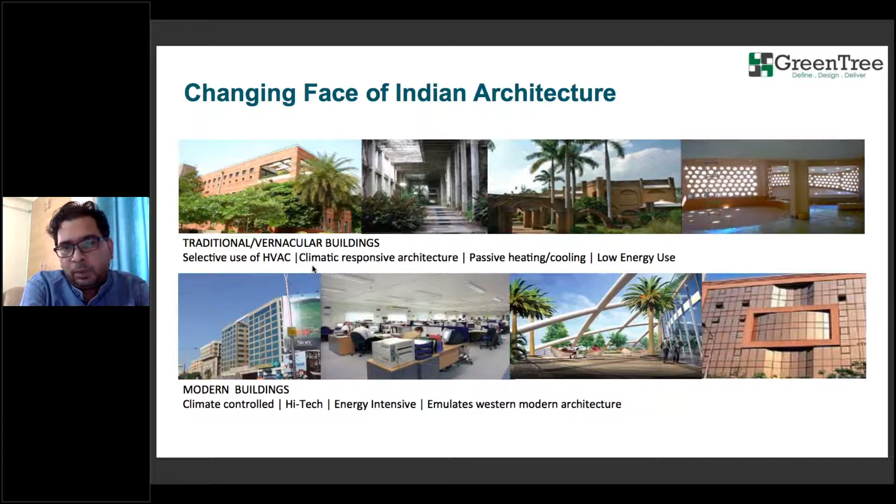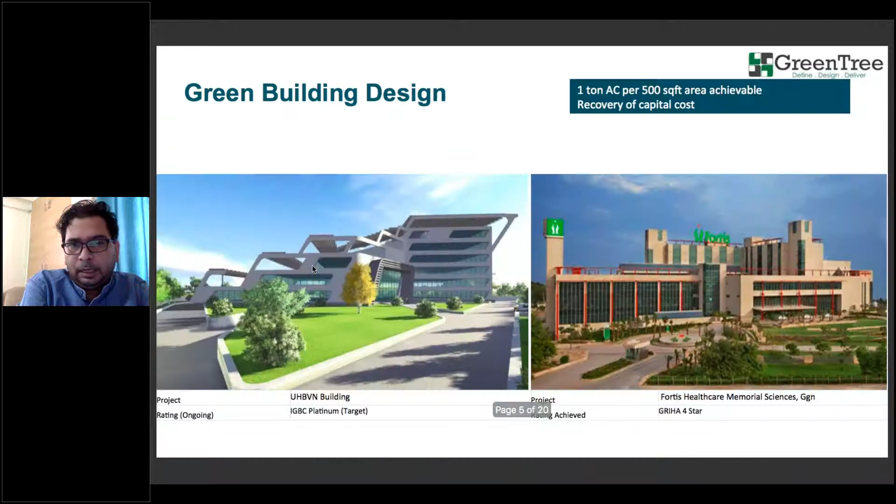My dear friends, I have worked with architect Charles Correa in my early career, and I have seen how architecture practice is defined by different sets of spaces. For example, we've seen spaces in terms of built mass designed with Jharokha, Jalis, courtyard planning, and lots of trees around buildings. Nowadays the buildings we see are a bit more modern, not that there's any issue with them, but they look modern. Whether in India or in developed countries, you'll see similar sets of buildings with specific built design aspects combining architecture and engineering.

That is where we see super efficient buildings, super platinum, or 5-gem, 4-gem star rated buildings. We always see an opportunity to learn from different aspects of buildings. But if we look at the core of all these aspects, even the core of the human body, we can always correlate specific components like Vayu, Agni, Jal, Akash, and Bhumi. They are all related to the built environment, and to the emotional, intellectual, and social well-being of the human body.

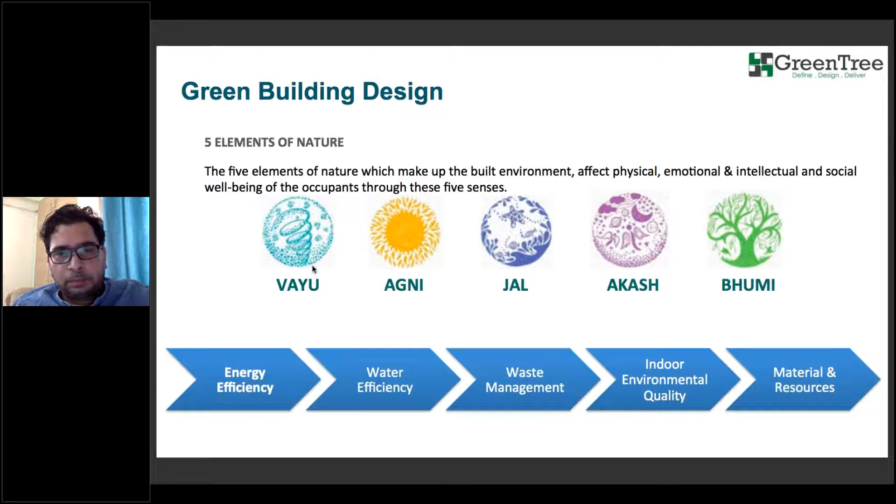तो ये सब चीजें बहुत इंपॉर्टेंट है। आई जस्ट शो यू थ्रू किस हिसाब से बिल्डिंग का जो एनर्जी एफिशिएंसी कंपोनेंट है, किस हिसाब से अचीव होता है। एनर्जी एफिशिएंसी के अलावा आई विल आल्सो ट्राई टू टेक यू थ्रू अबाउट द जॉब अपॉर्चुनिटीज एस्पेक्ट्स इन दीज स्पेसिफिक सोफिस्टिकेटेड एरियाज, ताकि आप लोग अपने लिए कुछ इस प्रेजेंटेशन से अचीव कर सकते हैं।

जब हम लोग बिल्डिंग की बात करते हैं तो सर्टेनली द फर्स्ट थिंग दैट विजिबल इज द एनवलप। जब हम लोग विलेज से लेकर के सेमी अर्बन लोकेशन और अर्बन लोकेशन से बात करते हैं, आप रियलाइज़ करते हैं कि बिल्डिंग की जो डिजाइन है वो गांव में बिल्कुल अलग होती है। छोटे छोटे घर होते हैं, जनरली मिट्टी के बने होते हैं या छोटे घर होते हैं, उनकी विंडो की जो साइज है वो कम होती है।

जैसे आप सेमी अर्बन लोकेशन में जाएं, आप देखिए घर के साइज बढ़ जाते हैं। ज्यादातर जो घर होते हैं वो सिंगल स्टोरी, डबल स्टोरी के बनते हैं। जैसे आप अर्बन लोकेशंस की बात करते हैं, दिल्ली, बॉम्बे, बैंगलोर एक्सेट्रा, आप देखिए वो 10 स्टोरी, 15 स्टोरी, 20 स्टोरी, और लेट्स से in our vicinity there is a building which is coming up, it's almost like 68 storied high residential.

तो इस तरीके के माहौल में जो लोग रहते हैं, उनकी लाइफस्टाइल में बहुत सारे परिवर्तन अपने आप स्वाभाविक है आना। इस तरीके की एक्टिविटीज के लिए कौन से ऐसे एलिमेंट्स हों जिसके थ्रू घर के अंदर का जो माहौल है, जो वातावरण है, उसको कैसे हम कंफर्टेबल बना सकते हैं। व्हाट आर द वेज थ्रू व्हिच वी कैन मेक द इंडोर एनवायरनमेंट मोर कंफर्टेबल। द फर्स्ट थिंग कम्स इज द एनवलप।

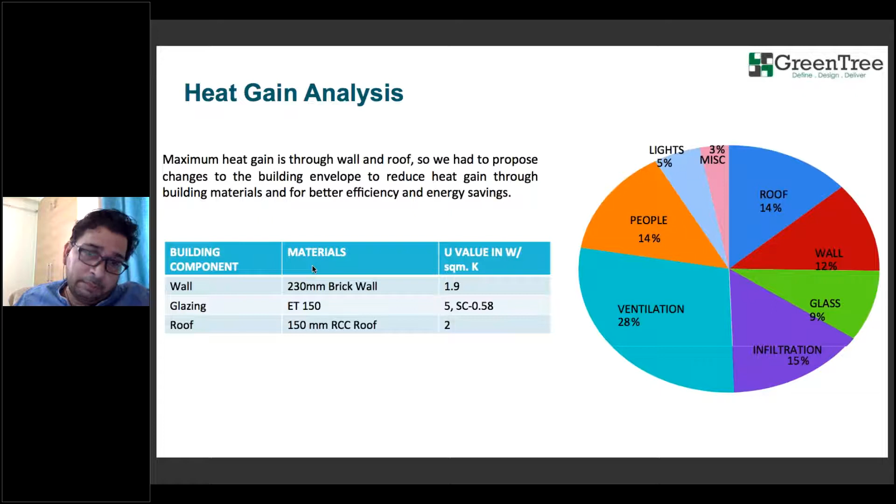हम सब लोग बाहर से भी देखते हैं और उसको अप्रिशिएट भी करते हैं, और वो चीज जिसको हम लोग बिल्डिंग टेक्नोलॉजी या बिल्डिंग डोमेन में टर्म यूज करते हैं, उसको हम लोग बोलते हैं एनवलप। एज द नेम सजेस्ट, एनवलप हमेशा वॉल, विंडोज और रूफ से मिलकर के बनता है। उसके स्पेसिफिक मटेरियल की जो कंपोनेंट है, दैट डिफाइंस कि कितना बाहर का जो गर्मी है, बाहर का जो नेचुरल रिसोर्सेज हैं, जैसे लाइट, या बाहर का जो हमारा बारिश होता है, वो कितना हम अंदर ले सकते हैं इन टर्म्स ऑफ ह्यूमिडिटी, इन टर्म्स ऑफ डे लाइट, इन टर्म्स ऑफ हीट, वो हमारे एनवलप कंपोनेंट डिफाइन करता है।

ये बहुत इंपॉर्टेंट एस्पेक्ट है, there is a lot of opportunity in this aspect in terms of new professional career options, क्योंकि बहुत सारी अपॉर्चुनिटीज कंपनीज इसी एरियाज में है। सिविल कंस्ट्रक्शन में बहुत सारी कंपनीज हैं, कंस्ट्रक्शन कराने वाली कंपनीज हैं, मटेरियल मैन्युफैक्चर वाली कंपनीज हैं, एंड सर्टेनली द डिजाइन कंसल्टिंग फर्म्स, दे आर देयर वेरी वेरी मच।

सेकंड एस्पेक्ट बिल्डिंग का अगर हम लोग देखते हैं तो लाइटिंग एफिशिएंसी। लाइटिंग सब लोग बहुत आसानी से इसको कोरिलेट करते हैं। I'm not too sure how many of you have seen and visualized the change in terms of lighting technology. पहले इनकैंडेसेंट बल्ब यूज होता था जिसमें हम टंगस्टन वायर यूज करते थे, और उसका कंजप्शन ज्यादा होता था। इट वाज ऑलमोस्ट गिविंग द येलो लाइट उस समय।

फिर उससे एनर्जी इफिशिएंसी का एस्पेक्ट शुरू हुआ 2006-7 से, जब CFL कॉम्पैक्ट फ्लोरेसेंट लाइट की टेक्नोलॉजी आई। इट रिड्यूसेज द एनर्जी कंजम्पशन अ लॉट इन टर्म्स ऑफ लाइटिंग इंडस्ट्री।

पर उसके बाद जब से LED आया है 2010 onward, you have seen the tremendous adoption and the change। लेट्स से 5 साल में LED, इनकैंडेसेंट से CFL में और CFL से LED में पूरी चीजें चेंज हो गई। मतलब द होल इंडस्ट्री गॉट रिवाइज्ड, changed with respect to the latest technology, with respect to the best energy efficient technology। तो इसलिए it also shows us the path that the moment there is a better technology available, better efficiency available, the industry will adopt the technology without thinking much। And that's exactly what has happened in this case।

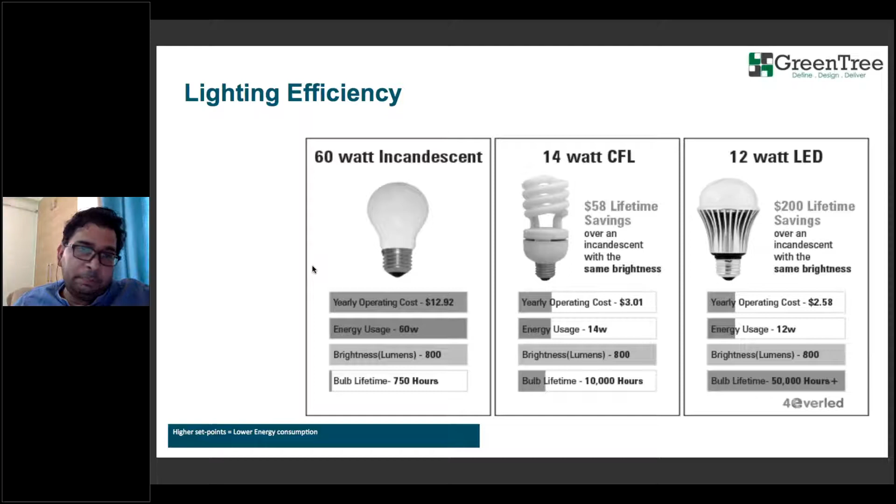Now, with Ashu we will apparently discuss a lot in terms of air conditioning and other aspects, but this is something that will give you a lot more opportunity with respect to job aspects। किस हिसाब से हमारी air conditioning industry grow कर रही है। In terms of technology, I would not say that technology has grown and has given a lot of outstanding equipment or technology, but it has grown a lot in terms of adoption of air conditioning from the mechanical ventilation side।

आप देखिए जब लोग पहले के घर बनाते थे या ऑफिस बनते थे, आप लोगों में से बहुत सारे लोग शायद उस एज में थे जहाँ ये सब चीजें बहुत ध्यान में नहीं रखी जाती थीं, बिकॉज यू आर सर्टेनली ग्रोइंग एंड स्पेंडिंग लॉट ऑफ टाइम इन प्लेइंग अराउंड। एंड देन जहाँ पे मेटाबॉलिक रेट इतने ज्यादा होते हैं बॉडी के कि आपको कंफर्ट एज ए बॉडी रिक्वायरमेंट बहुत फर्क नहीं पड़ता है।

But the moment you keep growing in your professional career and move from college to office, office to home, you will certainly see a lot more of these changes and requirements that become obvious to your human body.

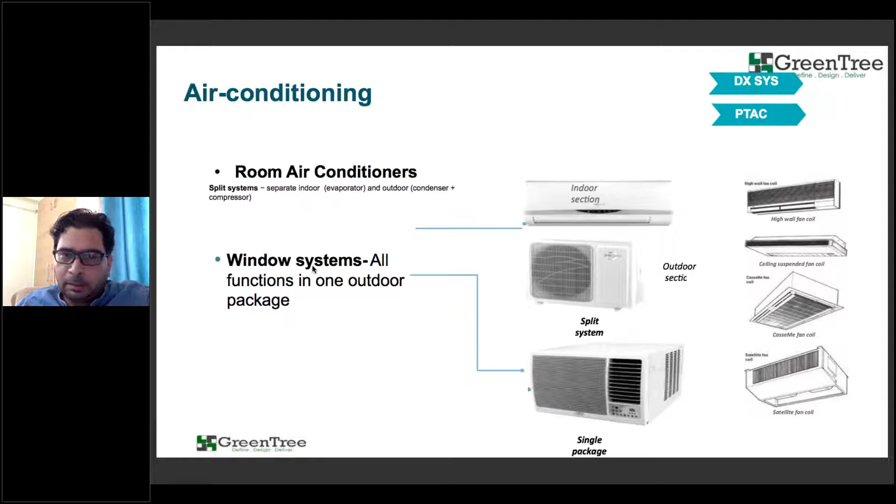From small DX direct expansion units to VRF VRV systems, then air cooled chiller systems, and then talking about centralized air conditioning systems - water cooled chiller systems, where there are many components, whether pumps, motors, chillers, cooling towers, air handling units - they all have a lot of equipment requirements, maintenance requirements, and certainly opportunities for young engineers in mechanical side.

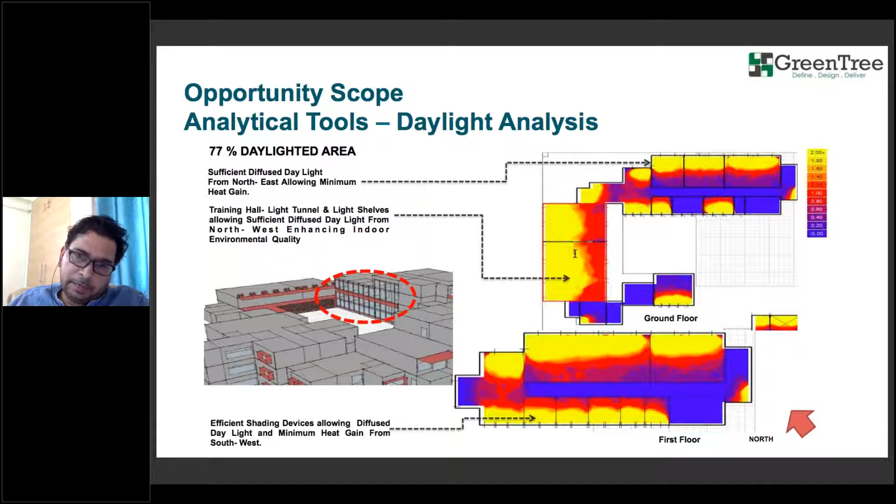Which all of you have to learn, and this is one of the tools we have used to ascertain how much daylit space can be there inside a building in terms of regularly occupied spaces, and how much daylight is coming in and how that daylight can be controlled. The moment enough daylight is available, then what are the ways through which we can avoid using artificial lighting systems, so that our intent in terms of energy savings can be fulfilled.

People or students who are studying architecture, it's very important in terms of landscape designing, which is a very specific skill, and there are smart ways of designing these aspects as well. Jab bhi hum landscape ki baat karte hain, we talk about different components, chahe woh grass areas ho, chahe woh tree ho, shrubs ho, or even the shades and shadows of the buildings.

Then what kind of landscape we talk about, and in which region the building lies, all these aspects put together, then we talk about different tools which help in identifying areas which have a longer day shadow, which have the shorter day shadow. Based on this analysis, you can identify konsa tree lagana hai, plant karna hai, deciduous trees chahiye ya annual tree chahiye. Is tarah ke design aspects ko hum bahut aasani se aur sophisticated tarike se justify karte hain jab client ke saamne baat karte hain.

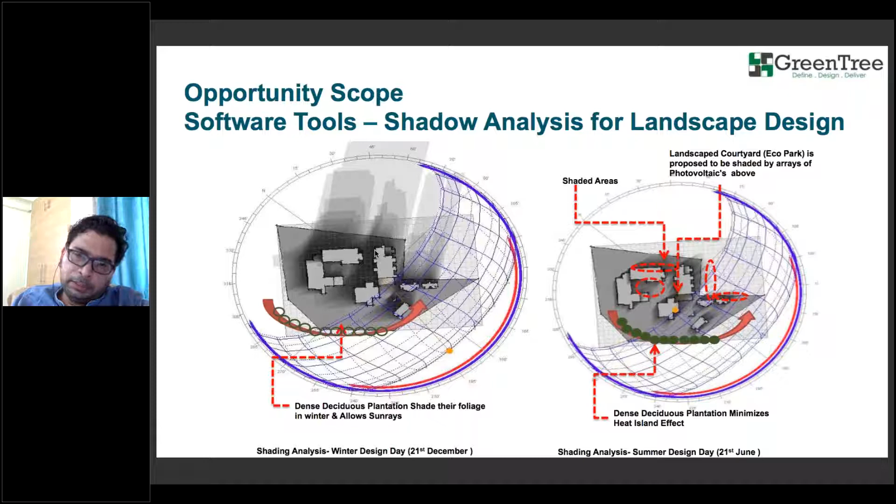Now, with respect to the opening of the building, the orientation of different blocks in a particular campus, again the same campus that we talk about, we designed it for a government department in UP, and this was certainly one of the requirements ki beech ka jo space, jab hum is region mein baat karte hain, it was assembly space, and a lot of people were supposed to gather in the morning around 10 till 11.

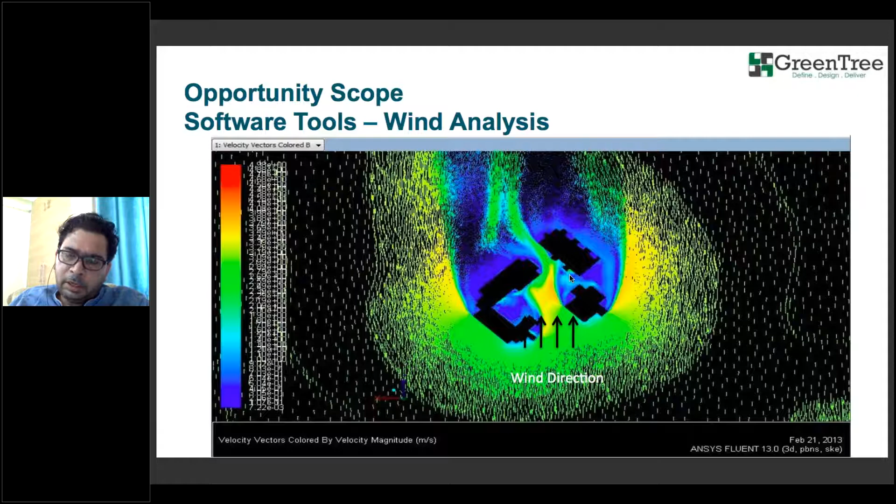And again, a few of the aspects like earth air tunnel etc, people who are becoming mechanical engineers from the colleges or in other fields like architecture, they can talk about passive architecture design, which is the need of the hour at this point of time with respect to the sustainability commitment from the nation and certainly from the globe as well with the current situation.

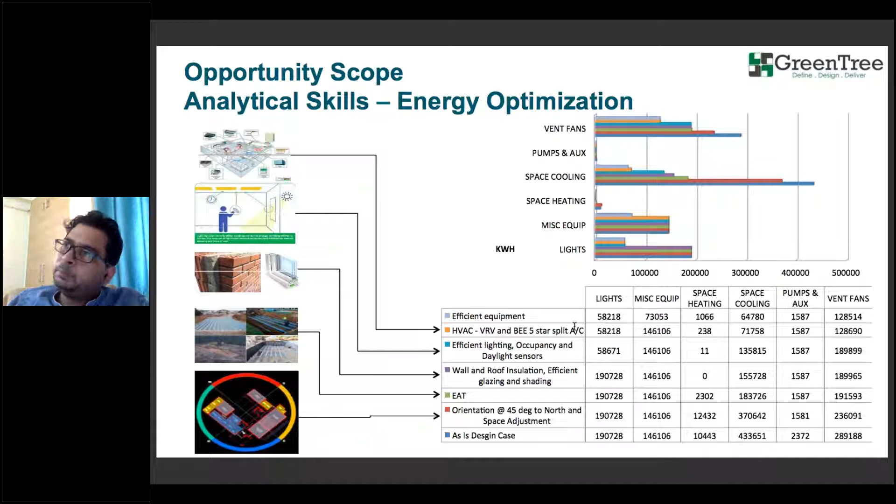Phir jo log software side se hain they can always understand there are different tools available, aur nahi hai toh jo log kabhi kabhi jo log software IT field ke log hain they also get involved in such companies which are designing such sophisticated tools ki kis.

लोकेशन में कौन सी बिल्डिंग है, उसका रूफ एरिया कितना है, उस रूफ एरिया के बेसिस पे रेडिएशन फॉल कितना है, और उससे रिन्यूएबल एनर्जी जनरेट कितनी हो सकती है। I always feel that most of the cases when the IT student or the computer science student visualizes the scope for such skills, they don't find these skills suitable, but I can guarantee and I can bet ये सब opportunities बहुत बहुत तेजी से आ रही हैं

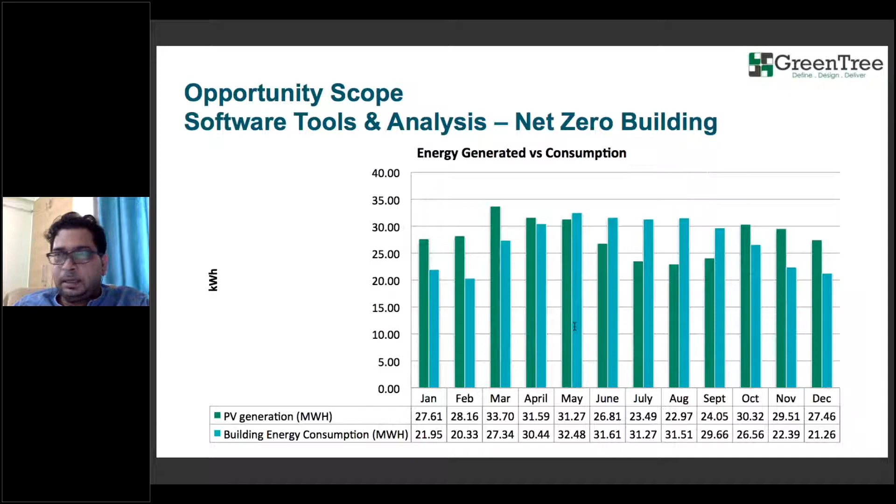in terms of energy management software, in terms of building management software, in terms of different other sophisticated tools जहाँ पे IT CS की लिए भी opportunities बहुत हैं। कुछ स्पेसिफिक अगर मैं जॉब स्पेसिफिक एरियाज की बात करूं आप लोगों के लिए विद रिस्पेक्ट टू जो कि हम लोग ये सब एस्पेक्ट्स ग्रीन बिल्डिंग रेटिंग्स में या एसोचएम जेम जो रेटिंग है जो अभी डिटेल में नीरज जी इसको एक्सप्लेन करेंगे, ये सब जहाँ पे अवेलेबल हैं। एंड देन इन जनरल ट्रेडिशनल कन्वेंशनल प्रैक्टिस की बात करते हैं बिल्डिंग डिजाइन एंड कंस्ट्रक्शन में, तो एक आर्किटेक्ट की रिक्वायरमेंट है, मैकेनिकल इलेक्ट्रिकल प्लम्बिंग या सिविल फील्ड की रिक्वायरमेंट है, ग्रीन बिल्डिंग कंसल्टिंग की रिक्वायरमेंट है, फैसिलिटी मैनेजमेंट की रिक्वायरमेंट है

और देन देयर आर डिफरेंट कंपोनेंट व्हिच also require a very deep down or specific deeper understanding of the knowledge. ये अगर मैं बात करूं कि प्री कोविड जब हम लोग बात करते थे लगभग जनवरी और फरवरी के बाद में, उस समय की लगभग ये रिक्वायरमेंट्स थी या जॉब प्रॉस्पेक्ट्स माने जाते थे बिल्डिंग डिजाइन कंस्ट्रक्शन में।

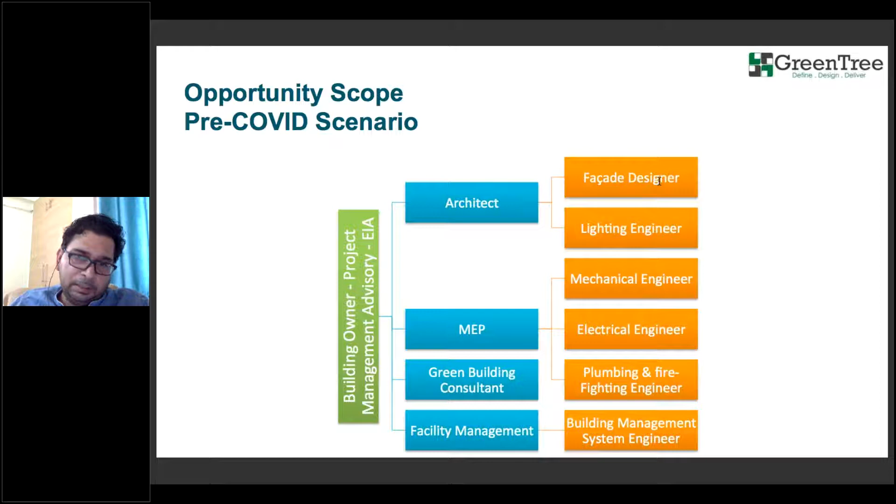Post COVID scenario में we also have seen few more specific areas which also got highlighted. जैसे ventilation expert की requirement बढ़ गई, energy expert की requirement बढ़ गई, because people have started thinking about optimizing the cost component of the building operation.

Then we talk about computational fluid dynamics. जो लोग मैकेनिकल साइड के लोग हैं, they can also understand कि किस हिसाब से हम इंजन डिजाइन करते हैं या कुछ एक स्पेसिफिक कंपोनेंट डिजाइन करते हैं जहां पे हम लोग ट्रांजिस या एंसिस इस तरह के टूल्स यूटिलाइज करते हैं इन टर्म्स ऑफ ऑप्टिमाइजिंग द एयर फ्लो, और जजिंग द एयर फ्लो कंपोनेंट इन दैट मैकेनिकल कंपोनेंट। वो अब बिल्डिंग के कंपोनेंट से भी बहुत सारा रिजेम्बलेंस रखता है। सर्टनली द पैरामीटर्स आर चेंज, द वॉल्यूम इज entirely different, but basic principles are remain unchanged.

And then we talk about the ducting or air handling units, then life cycle assessment. These are the few areas where we have seen lot of opportunities in current scenario, post COVID, I would say. और छोटी बिल्डिंग से लेकर के बड़ी बिल्डिंग तक सब में अपॉर्चुनिटीज आप लोगों के लिए बहुत हैं। इन टर्म्स ऑफ रेटिंग, दीज आर लाइक द मेन अपॉर्चुनिटीज आई वुड से।

एंड देन आप लोगों के कुछ स्पेसिफिक क्वेरीज हैं, देन यू कैन ऑलवेज write to me, anurag@greentree.global, and I'll be really happy to help.

So this is from my side, and आप सब लोगों को मेरी तरफ से यही संदेश है या यही information है कि this particular area has a lot of opportunity for you youngsters, and आप सब लोगों को ये मैं यही रिकमेंड करूंगा, आप लोग जेम सर्टिफाइड प्रोफेशनल्स को ऑप्ट करें। और उसमें बहुत सारी इंफॉर्मेशन है जो भी मैंने इस प्रेजेंटेशन में बताया। यू कैन ऑलवेज लर्न एंड सी in the next subsequent couple of presentations from Mr. Neeraj and Ashu, and look forward

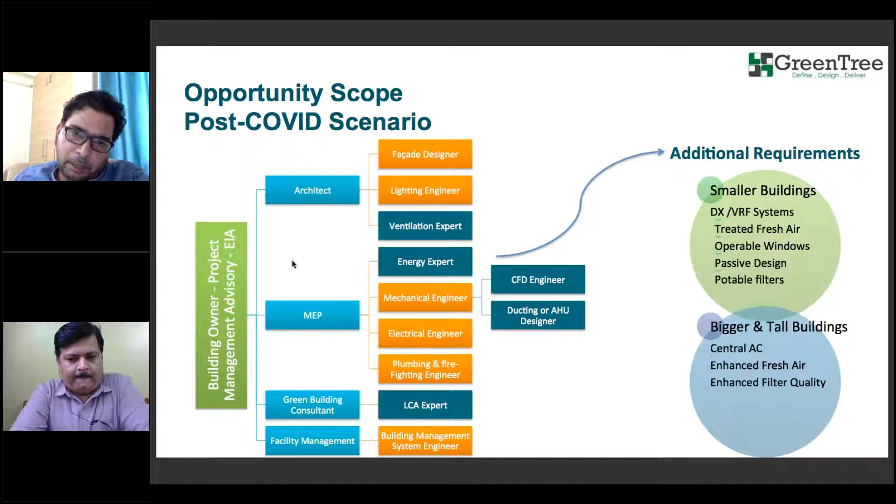Thank you, Anurag ji, for this wonderful presentation. And you have covered all aspects of green buildings. I could see some of the pictures from your daylight model where you were highlighting that how glass selection and window design will help in getting more and more daylight without any glare. And definitely proper window selection and proper window door opening will help us not only the daylight, but to help us receiving more and more fresh air. So in every aspects of daylight or fresh air, I mean, not more, but optimization is the best word to use. So glass selections help us in reducing the energy consumption of the building, because it saves the heat gain to the building. It helps us in receiving proper daylight, so it will help us in reducing the lighting energy consumption also. So this is really very important, and thank you so much for this presentation, Anurag ji.

And now friends, I would like to take you through GEM principles. So in my next presentation, it is around 40 minutes long. So I will take you all the principles of GEM program one by one, and out of those principles, energy, daylight, and fresh air will be taken by our third eminent speaker, who is Ashu Gupta. So meanwhile, I'll start my presentation. I'll take you all the aspects of GEM Green Building Certification Program, and in the meantime, I will let you know that how you can register for GEM Certified Professional Examination, how you can take the examination, and how and when you can take the examination, how you can proceed further.

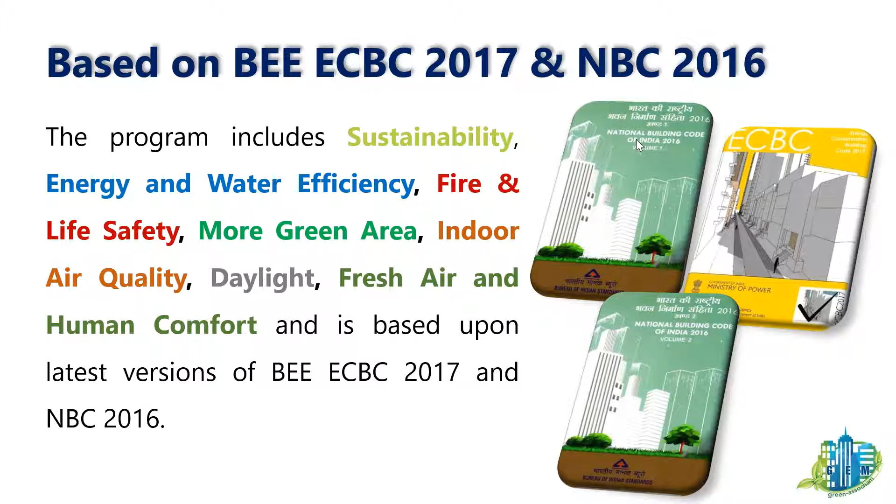Next is the GEM rating levels: GEM 1, 2, 3, 4, 5. As you have star ratings for electrical equipment like AC, refrigerator, and others, you have GEM rating for buildings. GEM 1 starts from 40 to 49, then 50 to 64, 65 to 84, 85 to 104, and 105 and above. So GEM 5 is 105 points and above, and the maximum points are 135.

Out of 135 points, if your building achieves 105 points, you will get GEM 5 rating. It also has a pre-certification level and a final certification level. So when your building is under design or under construction, you can have pre-certification, which will help you market your buildings well. And if your building is complete, 95% complete, you can go for final certification.

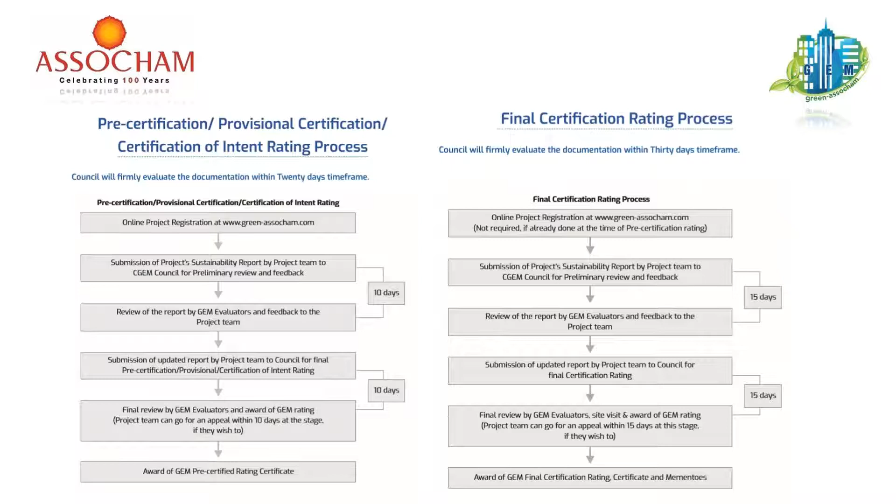Friends, now we will start going through the principles. I'll try my level best to make you understand these principles. So the first, essential and mandatory principle is that your buildings should be approved by the government, your plans should be approved by the government, by the local authority. So you must have the land allotment letter in the name of your project owner.

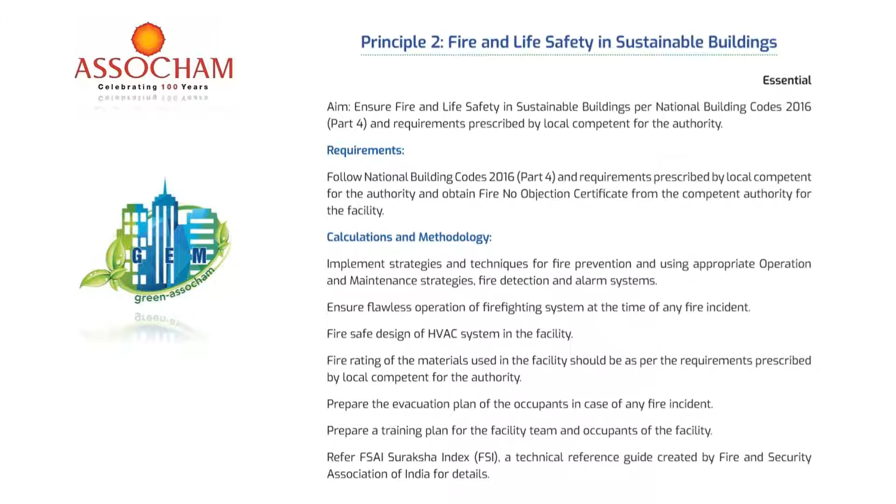Next is fire and life safety in sustainable buildings. Friends, this principle is mandatory, essential. This is the only program which has fire and life safety in the reference guide, because green buildings should be fire and life safe also. For this purpose, we are following the National Building Codes 2016 Part 4, strictly following these requirements, so the buildings going for GEM certification will be fire and life safe also. This is the only program which talks about fire and life safety. And for this purpose, we are referring to the FSAI Suraksha Index, a technical reference guide created by FSAI, Fire and Security Association of India. As we have signed an MOU with FSAI, we are referring to the FSAI Suraksha Index for making our GEM compliant buildings fire and life safe also. This is a mandatory requirement again.

Now principle 6, landscape best practices, has 4 points. As I mentioned, this reference guide covers residential, industrial and factory, institutional, as well as commercial and other projects, so we've given requirements for these different building types in a single book. For residential projects, to achieve 1 point, at least 10% of the site area should be green, should be landscape. For 2 points, it should be 15%. Similarly for industrial buildings, for 1 point 12%, for 2 points 16%.

And for commercial and other projects, for 1 point, 10% of the building area should be landscape, and for 2 points, 15% area should be landscape. Friends, landscape here means the green area over the mother earth only, not landscape area over a roof, basement roof, or any other hardscape area. So this landscape area must be over the mother earth only. We request you to plant native and adaptive tolerant flora on site. The plants you install should be native and adaptive. To achieve more points, 50% of the landscape area should be planted with native and adaptive plants. So this is the landscape best practices.

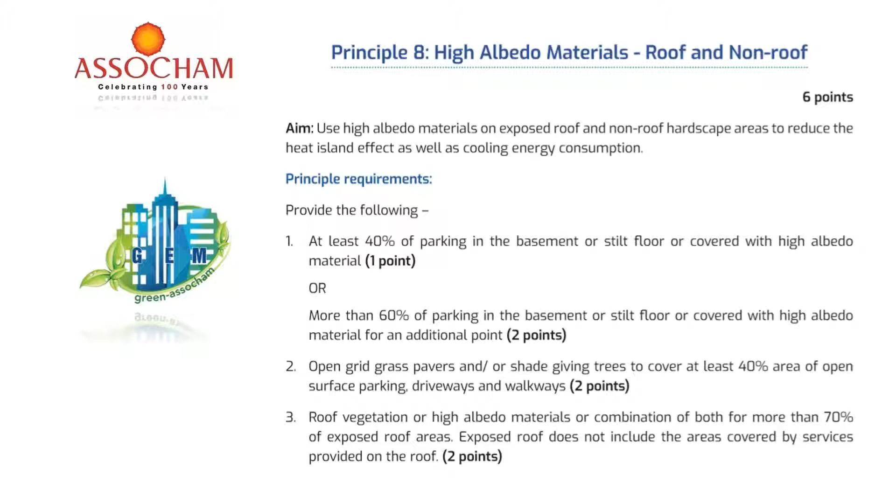Friends, at times, say for example your water table is high, and the government authority says groundwater recharging is not required. In many locations where groundwater tables are high, you are not supposed to do any kind of recharging, because as soon as you dig, you will get water.

So at those places, you can simply provide storage for the roof water, and we will award you the point. This is how flexible and practical this GEM certification program is, because many green rating agencies force you to do rainwater harvesting or storage where it is not applicable, since the rules cannot be same for Rajasthan as for Assam, Kerala or Punjab. So this is a very practical program and approach. You can follow this.

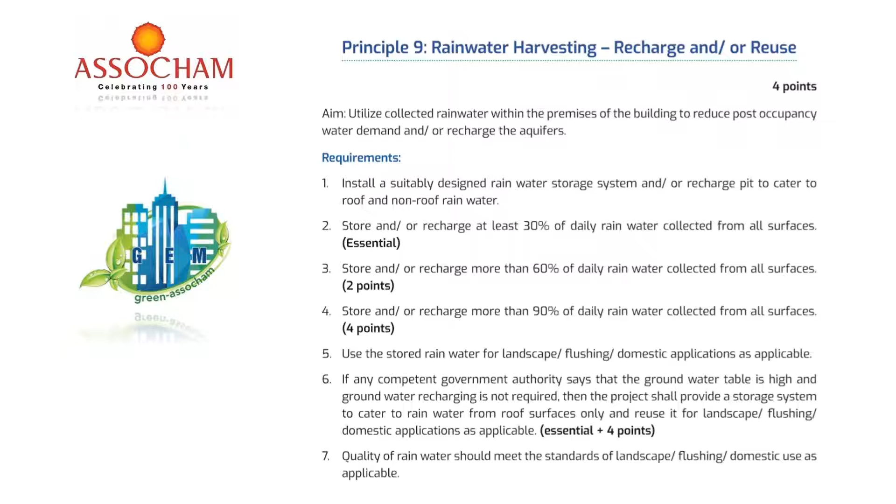Principle 10: install low flow water fixtures. Our council members and design team have drafted this program very smartly. We are not going to tell you to do any kind of calculation. While designing this GEM Green Building Certification program, our sole aim was to reduce the efforts done by our consultants. We have eliminated all types of calculations, calculators and manipulation from this program. What we are doing is awarding you the point simply by installing the product.

For example, if you are installing low flow water fixtures, we just award you the point for installing the product. If you install the product, it means you are saving water. There is no need to do any kind of calculation, because in calculation we can make a 30% saving show up as 40-45% just by changing some figures in the calculator. We don't want you to do that. We want you to be practical, straightforward, and honest to your projects.

If you install efficient water fixtures with low flow rates, not more than the values listed, we will award 1 point for each product. So if you are using water closets, health faucets, kitchen faucets, wash basin faucets, showers and urinals of the given flow rate, we will award 1 point each, and if you install sensor-based water fixtures, you get 1 more point. It has a total of 7 points. If you are not installing some of the low flow fixtures, we will simply not award those points, so your overall rating will not be hampered. If you install 1, 2 or 3 out of 7, we will give you points accordingly.

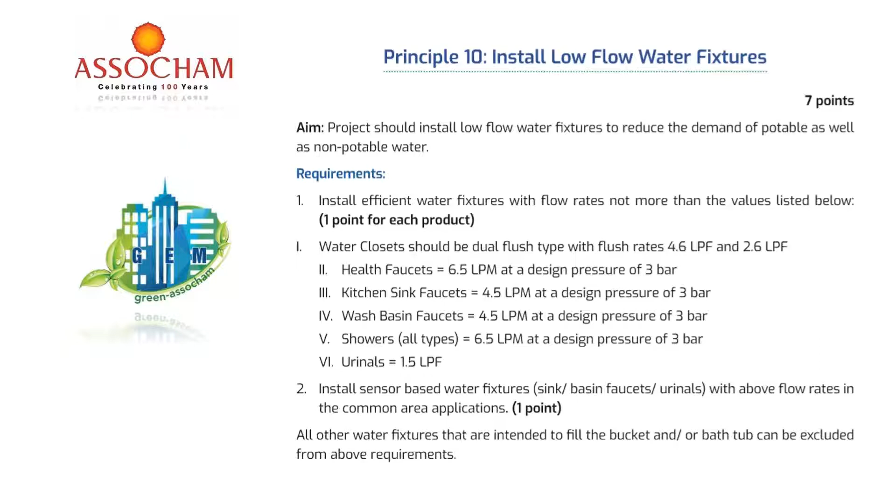Now principle 11: on-site treatment of grey and black water and reuse for flushing. This principle was also very smartly designed by the GEM professionals. The requirement is that we have to install an on-site wastewater treatment system to treat entire grey and black water from the project, and the quality of treated water must be CPCB and SPCB compliant. So we are requesting you to install a sewage treatment plant or ETP to treat your grey and black water.

What is grey water? It is water coming out from your kitchens and basins. What is black water? It is water coming out from your WCs and urinals. We want you to treat this water up to tertiary standards, as per CPCB and SPCB norms, and we will give you 2 points. If you install dual plumbing in your toilets to reuse that treated water for toilets and other locations where it does not come in direct touch, you will be given 2 points, so you will need to install dual plumbing for that purpose. And if you use this treated water for flushing up to 75-95%, we will award 2 more points. This is how the principle is written.

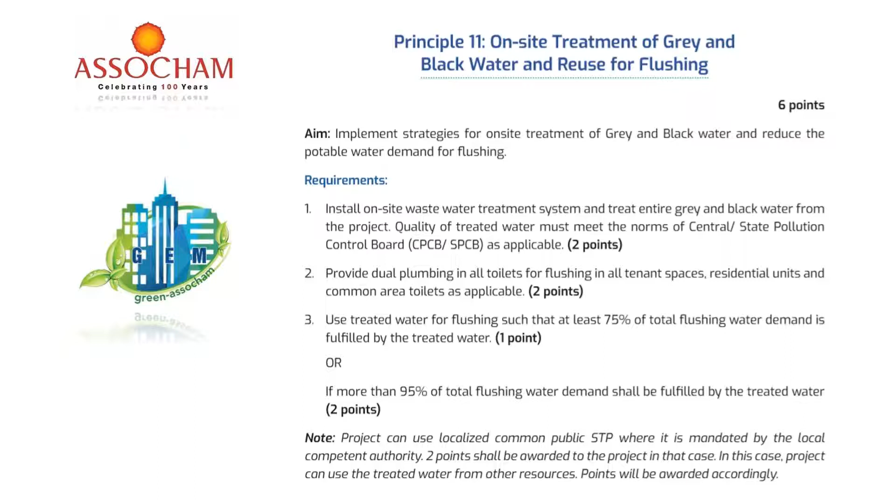Now, the most important point: in industrial applications, we have seen that small industries do not install an STP. Instead, they use a common STP provided by the municipal corporation or local authorities. In such cases, we have allowed that you can use that common STP, and there is no need to install STPs within their campus. This is a huge difference between the GEM Green Building Certification Program and other green rating programs, because those programs force you to install STPs within the site, whereas we allow you to use the common STP, since it is unreasonable to ask for STPs within a small plot when there is flexibility, feasibility and practicability in using a common STP. This is a very important feature of this GEM Green Building Certification Program.

Similarly, post-occupancy waste management. Friends, this is a wonderful program which is so smartly and efficiently designed. First of all, how would you calculate your waste? You will be able to calculate your waste as per NBC 2016 guidelines.

It is very clearly written in NBC 16 that for residential refuse, the waste generated per person per day is 0.3 to 0.6 kg. For commercial, it is 0.1 to 0.2 kg. For institutional, it is 0.05 to 0.2 kg per person per day. So this is how you will estimate the total amount of waste generated.

Out of the total solid waste generated, 40% may be taken as organic waste and 60% as inorganic waste. And the number of occupants can be taken from the project's MEP DBRs.

Friends, this is again where we faced many disconnects between the project's MEP DBRs and the actual reports being submitted to the green rating programs. We want to eliminate that gap. We want to match your DBRs with the reports you are submitting to GEM Green Building Certification Program. So we have clearly mentioned that you will strictly follow the MEP DBRs and NBC guidelines. There should not be any mismatch, any gap between the project DBRs and the reports you submit to GEM Green Building Certification Program for certification of your projects.

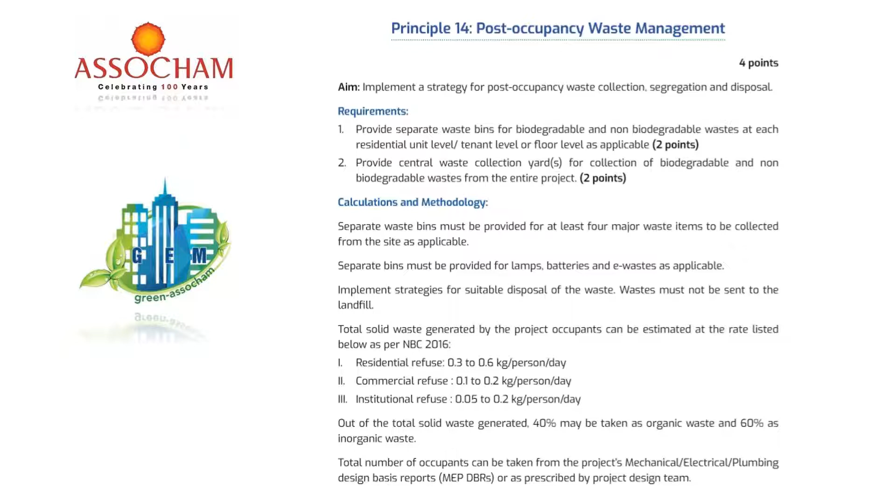And friends, this is the extension of principle 14. Here we say that after collection and segregation, you are required to install strategies to include, but not limited to, vermicomposting, organic waste converter, biogas plant, and the project team shall share the capacity sizing calculation for on-site biodegradable waste management system. So what you have to do is implement these strategies for on-site treatment of the entire organic waste you are collecting.

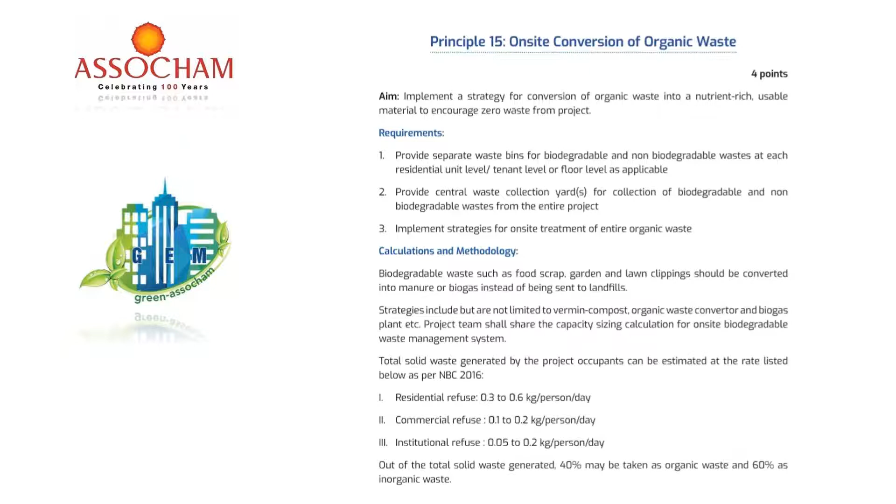So you can take the quantity from NBC guidelines, from MEP DBRs, from the formula given by NBC. You will do the calculation, and then accordingly decide what strategy is suitable for your project, for your location. And you will have to submit the sizing calculations and supporting documents to get these 4 points.

Now comes a very important principle, which is sustainable development of construction engineering. It means that we request you, we suggest you to use the building construction materials judiciously. We request you to use building construction materials which have recycled content.

And here again, friends, what we have done is we have eliminated the calculations. We have eliminated all the calculators. We are not forcing you to do any calculation or manipulation to achieve the points. So friends, like in water fixtures where we gave you points for installing products, here also we are giving you direct points if you are installing recycled materials.

Say if you are using facade glass, door or window glass with recycled content of more than 15%, we will give you 2 points. If you have 50% of masonry or plaster work, we will give you 1 point. We are requesting you to use PPC cement for 50% of masonry and plaster work, and for 75% we will give you 2 points. We are requesting you to use fly ash bricks, AAC blocks, or similar products for brickwork. For 40% and 80% brickwork, we will give you 1 and 2 points accordingly.

We are requesting you to use fly ash in concrete mix. We are requesting you to use steel bars which have recycled content. We suggest you use tiles that also have recycled content. So these are 6 major items which you can use in your buildings, and if you use these 6 items with recycled content, we will give you 12 points. So friends, this program has given so much importance to building recycled materials that it has 12 points, which is huge.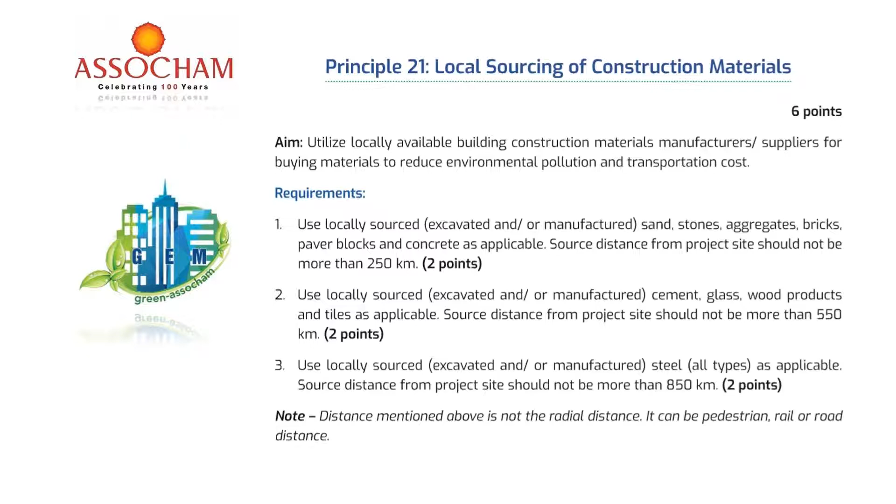Next is principle 22, judicious use of hardwood or softwood. First, ASSOCHAM requests you not to use any kind of hardwood or softwood in your building, door frames, doors, or furniture. If you avoid this, we will give you 1 point. If you want to use wood, you can use engineered wood products such as MDF, low density fiberboard, and plywood for door frames, doors, and furniture, since these are engineered and recycled, and should be free from urea formaldehyde.

If you use rapidly renewable materials such as bamboo, cotton, or natural rubber, we will give you 1 point, for a total of 4 points. So first, do not use wood; if you do use engineered or recycled wood, it should be urea formaldehyde free, and use rapidly renewable materials.

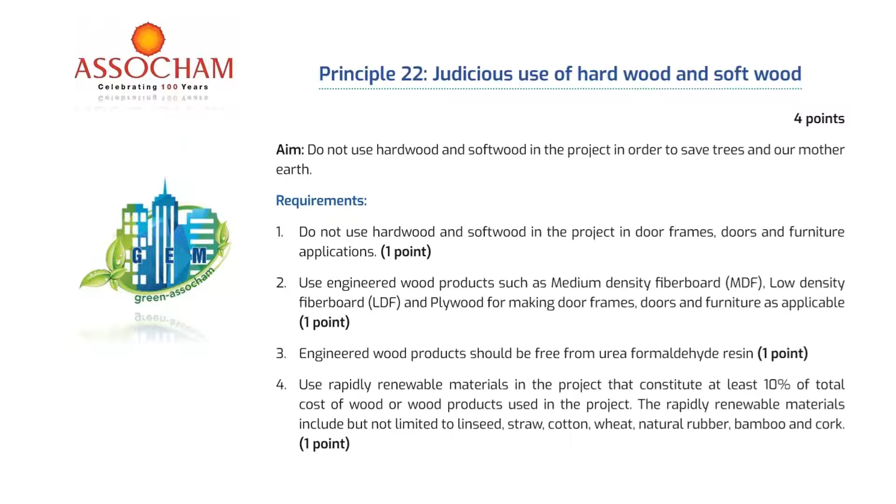Now this is principle 23. This will be taken by our next speaker, Ashu Gupta ji.

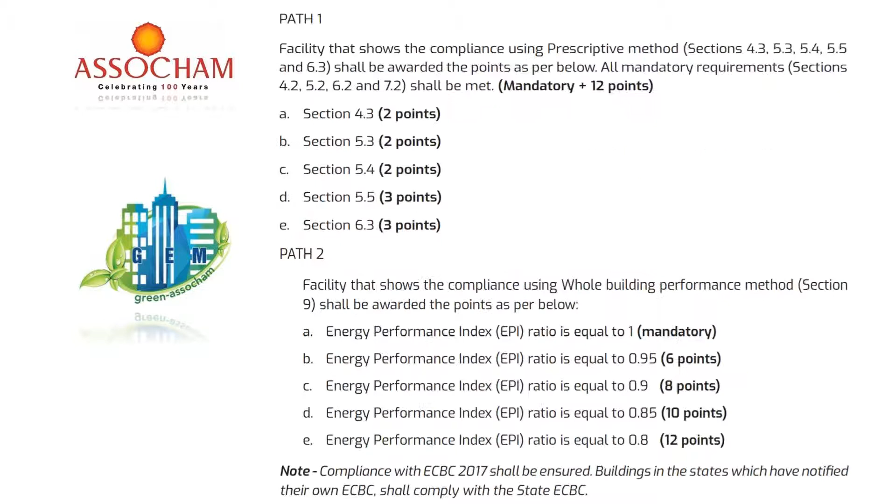This is principle 25, use of imperishable energy resources. We suggest you use recyclable, imperishable energy resources such as solar, wind, or biogas. We request you install on-site imperishable energy systems to offset part of the electrical contract demand of the project. If you install 5%, 10%, 15%, 20% or 25% of contract demand, you get 1, 2, 3, 4 or 5 points respectively.

If you do not want to install it on-site, and instead install it off-site, we will still award points: for 10%, 20% and 30%, we award 1, 2 and 3 points. For industrial projects, you can consider only the non-process electrical demand loads for sizing the imperishable energy system capacities. This principle awards a maximum of 8 points.

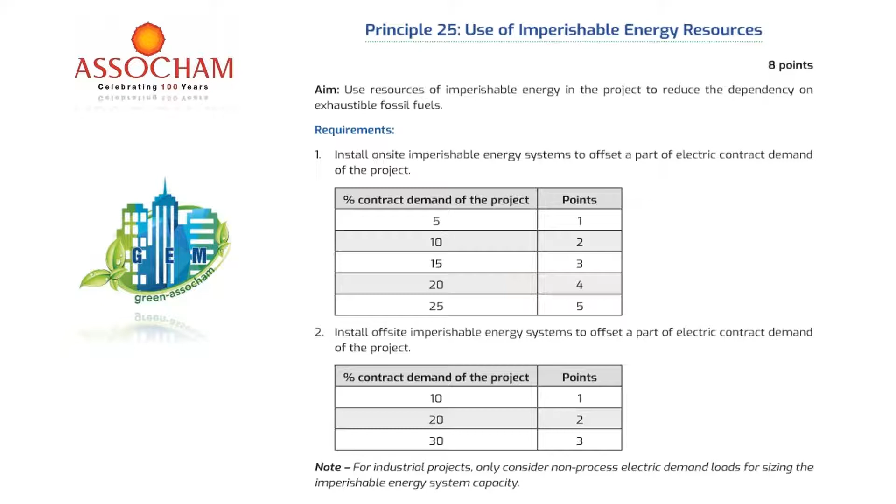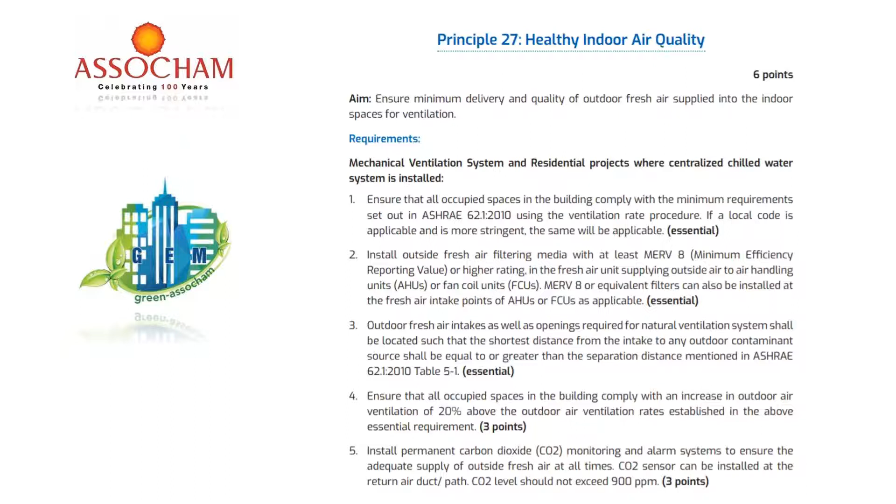This is optimal use of natural light, which will be covered by Ashu Gupta ji. This is healthy indoor air quality, also covered by Ashu Gupta ji. So Ashu Gupta ji will cover energy, daylight and fresh air -- these 3 credits.

Next and last is principle 30, going the extra mile. Although this GEM Green Building Certification Program is very flexible and we are open to all your sustainable efforts, if you are doing any sustainable or green building effort not covered in the above principles, we will still award you points. You come to us, mention that you have done this green or sustainability feature in your project, and we will award the points. A number of such points are given in the reference guide.

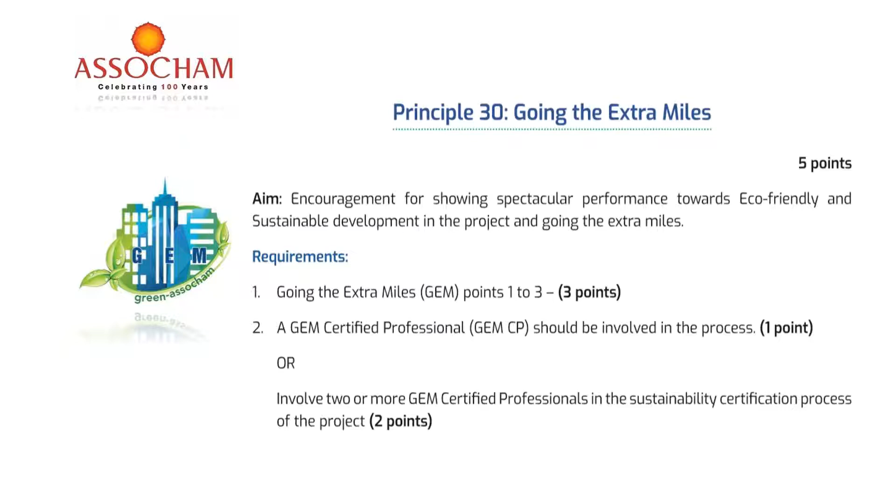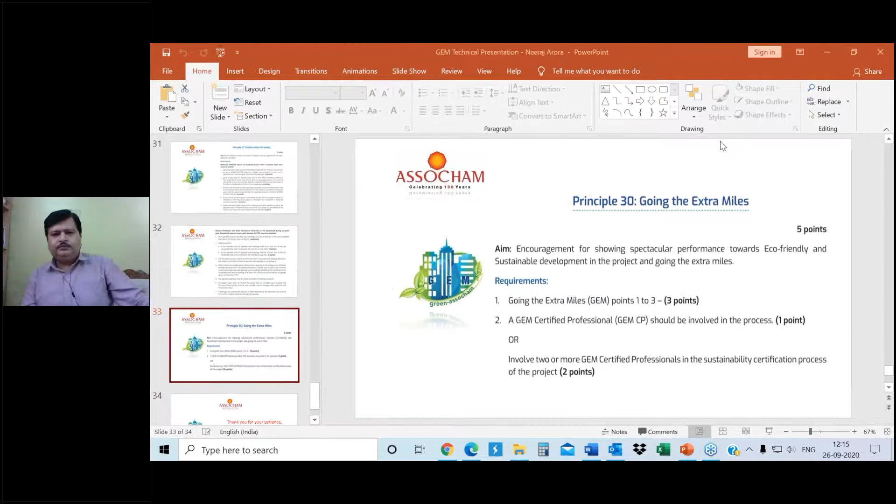Yes, yes. Ashu, welcome. So friends, I have covered all GEM principles, and as I mentioned, energy, daylight and fresh air will be taken by Ashu ji.

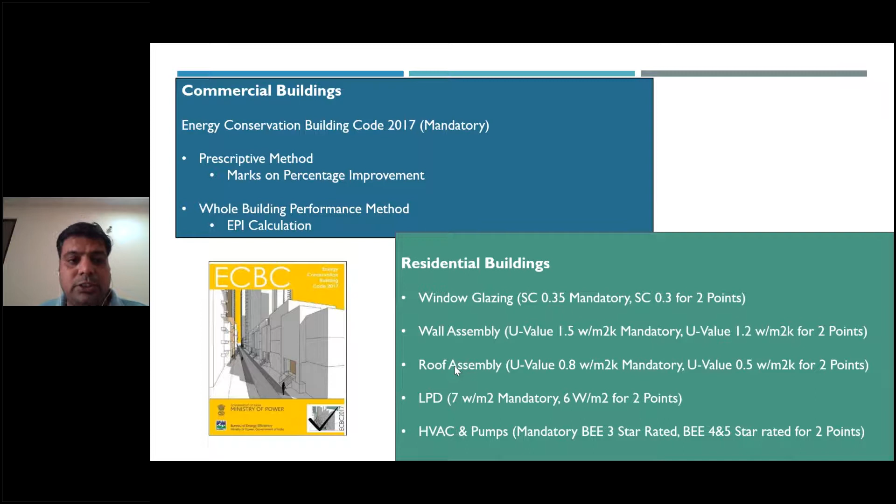ECBC code is a code from the Ministry of Power. I request each one of you to Google this after this program, because you will understand better what ECBC actually is. It helps reduce the building's energy demand.

This is efficient building. These days everyone talks about net zero or net carbon positive buildings. These can be achieved with the help of renewable energy, but we need to first make more efficient buildings, then go with renewables. Putting up solar panels is not energy efficiency by itself. If we want energy efficiency, we need proper envelope design. These are the actual integrated processes for how we can make our building more efficient.

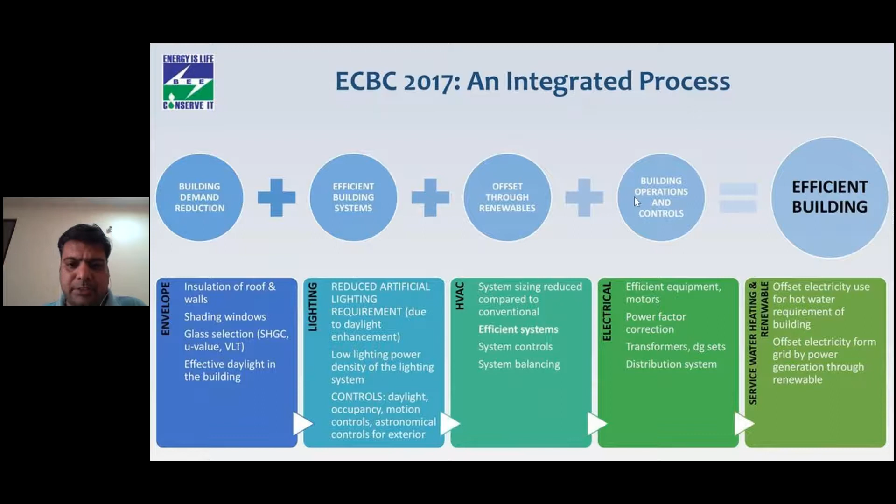Principle 23 talks about energy management best practices. There's an ECBC compliance method which is direct, and there's also a prescriptive method. If we follow all the methods explained in the Energy Conservation Building Code, our building can be more energy efficient.

For residential buildings specifically - why focus on buildings? Because a lot of people say industry consumes more energy. But globally, 40% of energy goes into buildings. You construct a building and don't demolish it for the next 50 or 60 years, so your energy consumption keeps increasing over time. That's why buildings play a very important role in the carbon emissions we're having.

This highlights glazing, what kind of glass we should use. This is very important, because I'm sure many of you aren't aware what kind of glass to purchase. You've traveled in 2-tier or 3-tier air conditioning coaches in trains - you've seen different glass there, because in those coaches you cannot see outside properly, as they have 2 layers of glass with vacuum in between. Very few buildings in India have such glass, called DGU glass, double glazed glass.

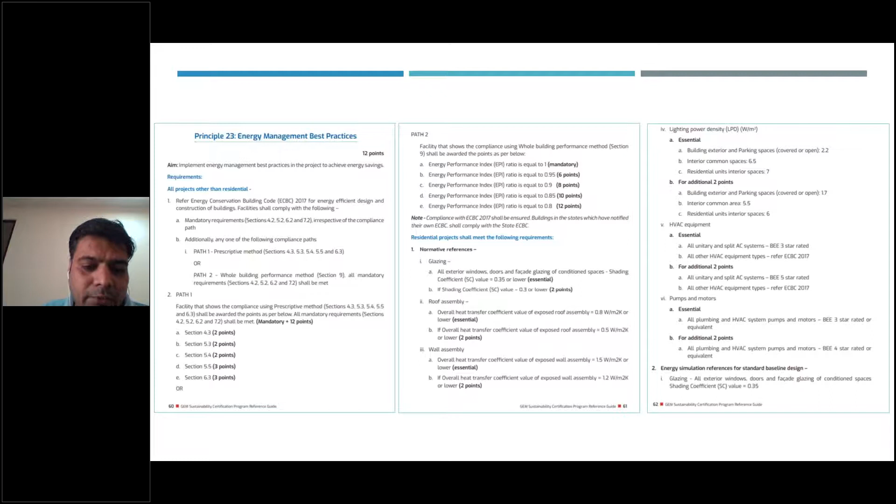Whenever you construct your house, sustainability isn't only for big buildings. Sustainability - whether you're making a 100 square feet home, there are features you can utilize to save energy or save water. This is explained in the GEM principles, which have the detailed calculations.

There's a term - this is for new construction when we talk about that, but if you have an existing building and want to understand your energy consumption, how can we compare it with the national benchmark? There's a term called Energy Performance Index, EPI. Whatever the energy consumption divided by total built-up area, this will be your EPI for that building. You can compare that EPI with the Bureau of Energy Efficiency standard, what EPI the BEE specifies for your climate zone.

Once you go through the detailed examination process via the GEM guide, you'll get to know more about it. But there's a huge requirement in the energy sector. I was reading somewhere that still only 7 or 8% of people in India have access to air conditioning, and this is increasing in a big way.

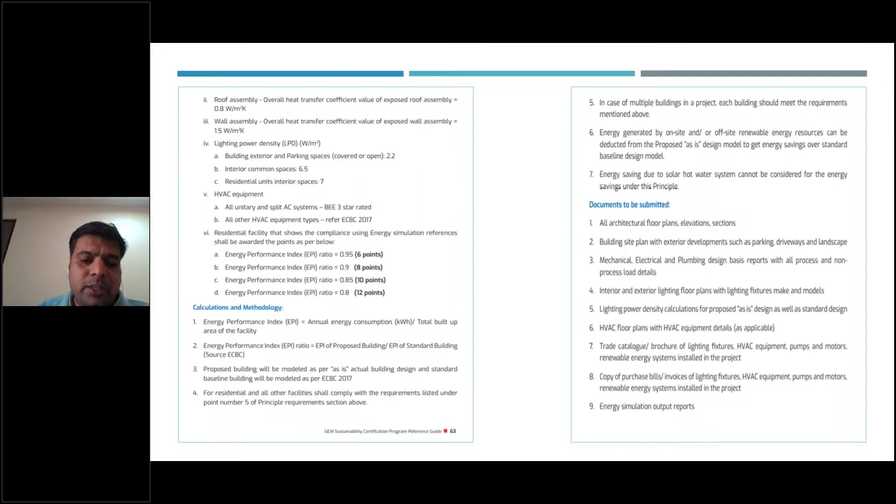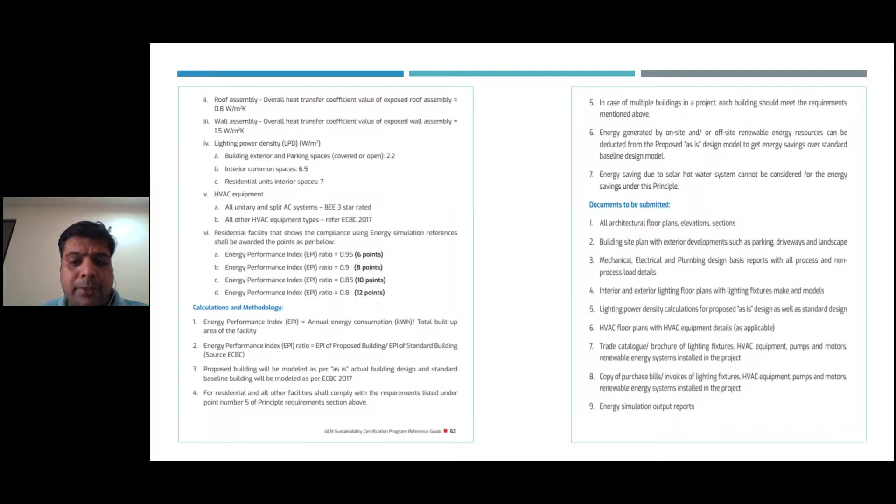As a mechanical engineer, I always thought I would go into automobiles, but air conditioning is a huge opportunity - a lot of development, a lot of invention is happening to reduce carbon emissions, and this is something we can focus on in that direction also.

Principle 24 is called efficient electrical equipment. There are many equipments in a building, electrical equipment, where the energy actually goes. There's a requirement for transformers - if you have a transformer in your building, it should be compliant with ECBC code, Energy Conservation Building Code. There are requirements for maximum losses in any transformer at 50% load or 100% load. Similarly, motors consume a lot of energy in industries.

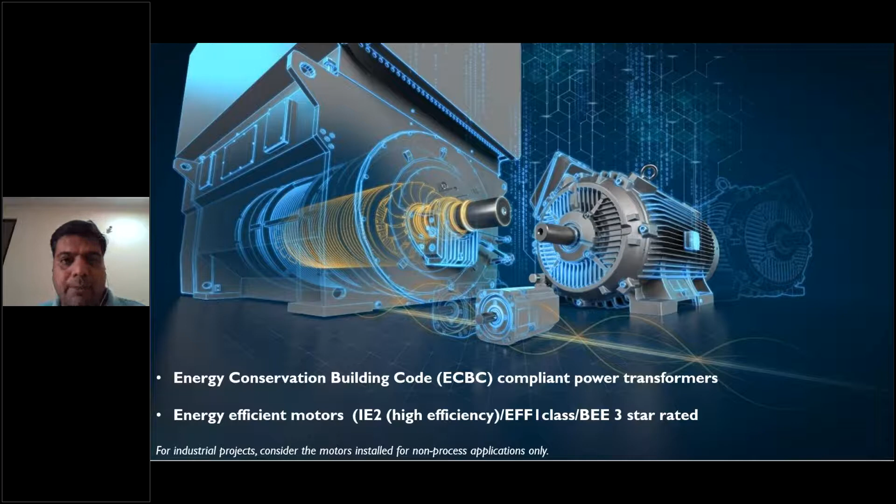You have seen so many motors, but there the efficiency comes in terms of IE1, IE2, IE3, IE4, IE5, and BEE also gives the rating to those motors. We need to understand that we need to opt for the higher efficiency motor. Otherwise, there is huge consumption going on every time. So this principle 24 talks about the efficient electrical equipment system.

If you install the motor with IE2, you will get 1 point. IE3, you will get 2 points. So very simple concept, it doesn't require any detailed calculation of what kind of equipment you've done. If you just install it, as if you have an electrical consultant in your project installing that product, you will get the point directly in that area. What you have to give as proof is invoices and the catalog or brochure of the transformer or motors.

Principle 25 is about use of imperishable energy resources, when we talk about renewable energy. Last week only, the government of India was talking about renewable energy generation in India doubling or tripling, with a huge target by 2022. This is the option, because otherwise with coal, the carbon emissions we are doing get the ozone layer distracted. Clean energy is the option to offset that, because we have to move from coal power plants to renewable energy plants. Otherwise, we will not be able to face the proper climate in upcoming years.

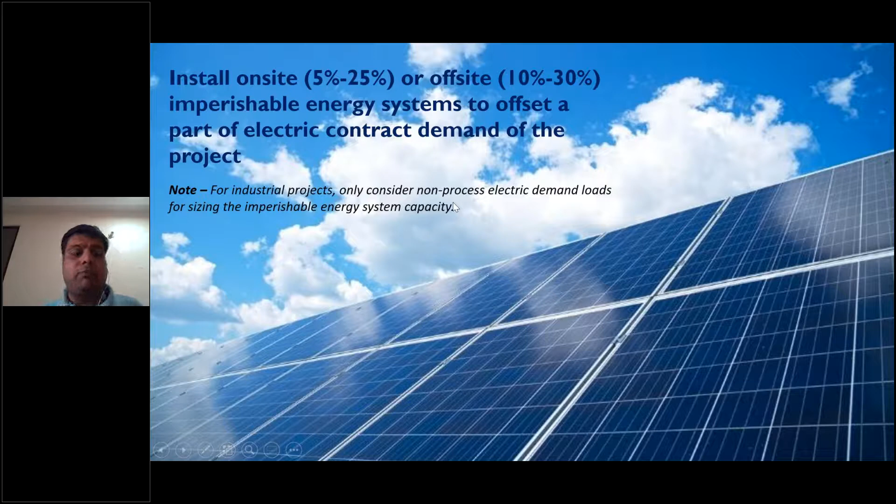That is the reason this GEM certification also promotes that every building should do a minimum installation of solar at their site. Every building should have its own electricity generation. So there is a requirement for 5 to 25%. I'll show you what that is. If you do 5%, if you have a project putting 5% of the contract demand as solar, wind, or hydro, that's 1 point they will get. Up to 25% of the total contract demand gets 5 points.

Now these days it's not required to be only at your building. If you have a building without space to put solar, you can do an off-site investment also, which is called, like in Rajasthan I belong to Jaipur, and major people are doing this, they have a building in Jaipur or some other area but are installing solar in Bikaner or Jaisalmer in those areas to improve and enhance the clean energy process. So this principle talks about imperishable energy resources, and we need to give proof as a brief report, drawing, and purchase bills of how we are doing it.

But solar is in huge demand. You can see the National Skill Development Corporation is focusing on solar installation. In the next 5 to 10 years, I can ensure you every house will have solar, because we do a lot of solar installation, and we have seen the bill of individual house owners become zero. Sometimes the monthly bill doesn't come, because these days the policy from the government is so favorable, you can generate your own electricity. You don't need to take electricity from the grid.

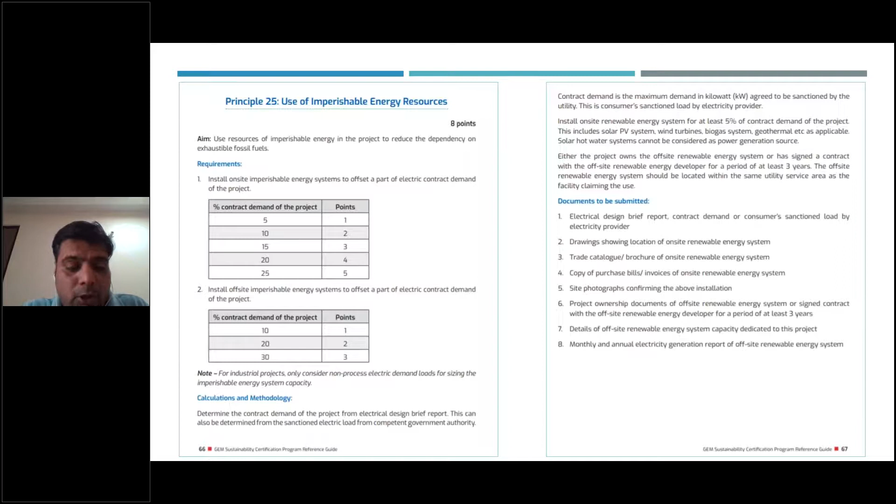Whatever you generate, like if you are generating electricity every day, but for 1 or 2 days your office is off, like Sunday or Saturday, your electricity is still generating by the solar plant. You can trade off that electricity to the government department, and your entire bills can be zero sometimes if you do such kind of work. That is the reason net zero energy buildings, net positive energy buildings are in the process of being made in India, already developed in India. So this is something is the future which we have to understand.

Principle 26 talks about optimal use of natural light. You have seen this is directly related to the productivity of the person. If you work in a basement area, your productivity of working will be different. And if you work in a natural daylight area, your productivity will be different. And this has already been proven in studies with patients.

There are some case studies available from hospitals. If you put the patient in a basement area where no daylight is coming, the recovery rate of the patient was very low. But if you put the same patient in a natural daylight area, the patient can recover very fast. This is something we need to understand, and why IT buildings and several hotels are going towards green building certification and sustainability, because they have understood the major cost of any building is the employee.

If employee productivity gets distracted, they cannot make more money, and they need to take care of their building, because those buildings should have natural light or air. This is something the optimize credit talks about, the optimized use of natural light.

This principle says there are two methods to prove that. One is simulation, same as how we do energy simulation, we do daylighting simulation also. We can construct the building virtually, put in the climatic condition weather file, and see how much daylight is coming inside the building.

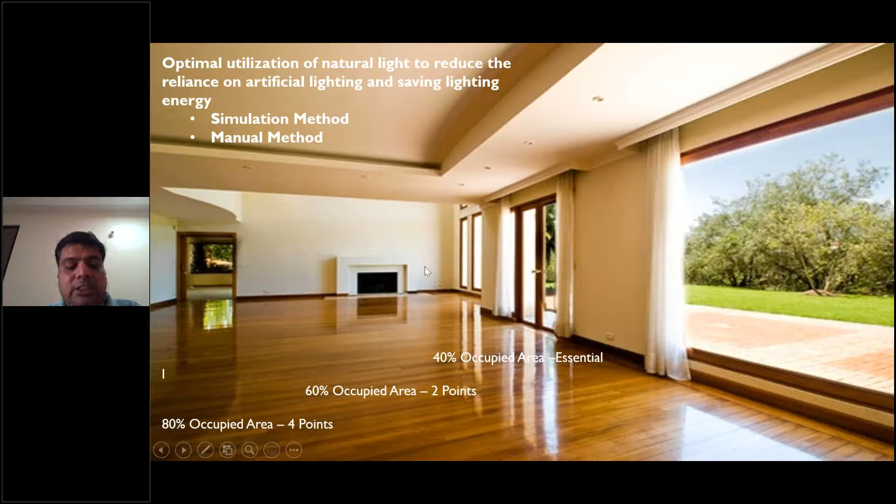These kinds of software we need to learn as an engineer and architect; a very important method is to learn the software. So this is the simulation method we can use to prove, with a report, how much daylight and how much occupied area is having daylight - these results we get from the help of simulation software.

Now there are sensors - occupancy sensor, you just enter the building, light will turn on, you go out, light will turn off. Daylighting sensor, when daylight is coming in, your artificial light can turn off. These kinds of sensor technology and sensor companies are coming up every day. Everything is talking about IoT, Internet of Things, artificial intelligence. Buildings can also have similar work - all these technologies can be interrelated to each other.

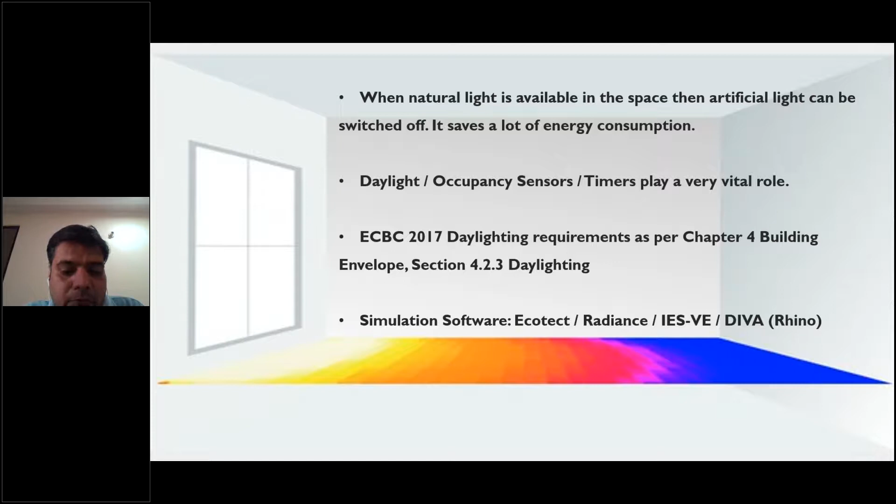ECBC 2017 has daylighting requirements also, and this principle follows the same. There is some simulation software available - Ecotect, Radiance, IES, Rhino. You can use any kind of software and prove this principle with its help.

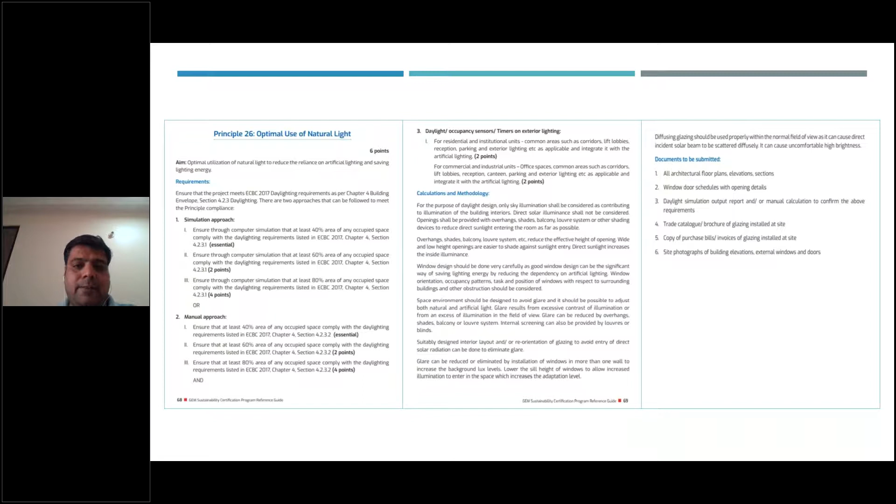Principle 27, which I need to cover and focus on more, because we have seen in the COVID situation how indoors are most important in our life. Government is talking about outdoor air, because I'm sure some of you belong to Delhi. After November or December, once the farmers burn the residue, and of course Diwali times comes up, everyone talks about the air quality being so poor.

We were using masks on those days. We hadn't thought we would wear masks so much, but Delhi people were using masks in their daily life. The air quality was so poor. But try to understand the point - how much time do we spend outdoors?

90% of the time, most human beings spend their time inside a space - either home, office, car, metro, or anything. 90% of our daily time we spend indoors. And how is indoor quality important for our life? Because you are aware what kind of water you are drinking, what kind of food you are taking, but are you aware what kind of air you are breathing inside your lungs?

This is something we need to understand, because in indoor conditions, you put an air conditioning system and close all the doors of your room. There is no oxygen coming inside the building. The people inside the room are emitting carbon dioxide. There is no oxygen in that room - what kind of indoor air is it? This is something we need to understand, the indoor air quality.

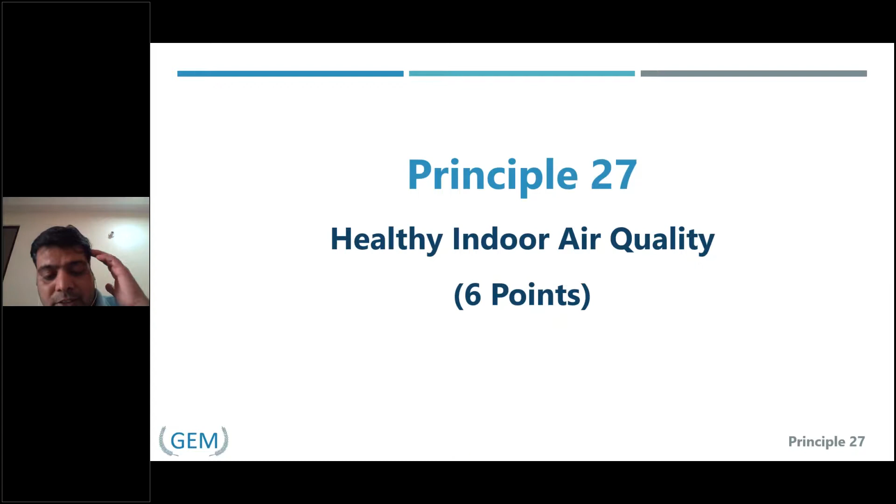During your engineering, during your master's program, you guys need to understand your project in this sector - indoor air quality. We have seen the conditions in several places in India where PM 2.5 particulates and PM 10 particulates are so high that we are not able to survive. That was the alarming condition.

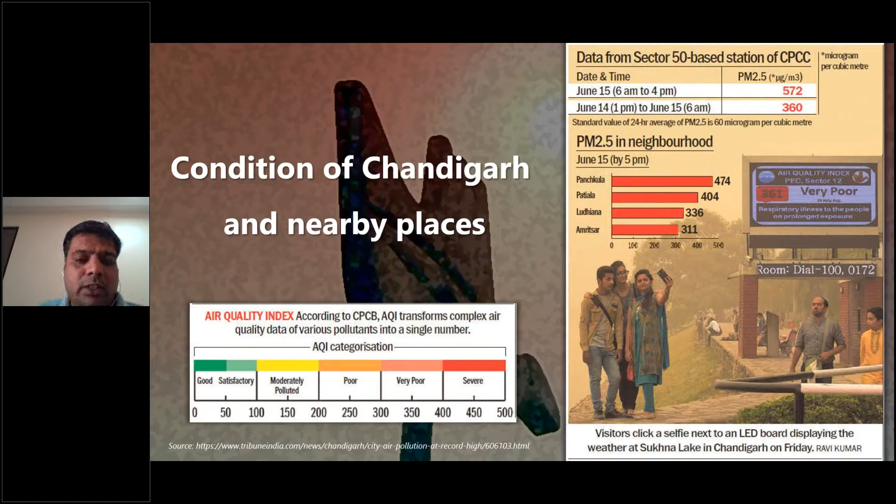Due to COVID, industry was shut off, people are not on the road. Current air quality index is in range, but this is temporary. Next 2-3 months we will see more, but after that what will happen? The same situation will come, and how will we be able to survive? We will get a lot of problems related to asthma, related to our lungs. We will not be able to survive, and this air quality we have to understand.

So this GEM certification principle says the building you make is for the people, and those people should get fresh air mandatorily. That is the reason this says the building should have ASHRAE 62.1. ASHRAE 62.1 talks about fresh air, and we need to provide that fresh air inside the building. We also need to clean whatever air is coming from outside to the inside.

We need to clean that air, and this we can do with the help of filtration media. There are several filtration media available which can increase quality, because whatever air conditioning we are using, if you look at it after 15 days, the condition of the filter is so bad. You will see your split ACs or window AC, whatever you are using at your house, in 15 days how the condition turns, and what kind of air we are inhaling in our body. This is true even in centralized buildings where centralized air conditioning is happening. Proper cleanliness, proper treatment, and proper filtration media we need to put, and this principle talks about it.

Similarly, we also need to install permanent carbon dioxide monitoring. Like if you have a classroom building, in that classroom 50 or 60 people are studying, everyone is emitting carbon dioxide, and at some level the carbon dioxide level gets so high that people will not be able to sit there. That is the reason we should have a carbon dioxide monitoring station there, so they get an alarm that carbon dioxide is going so high, and we need to put in some oxygen. This is happening in the building.

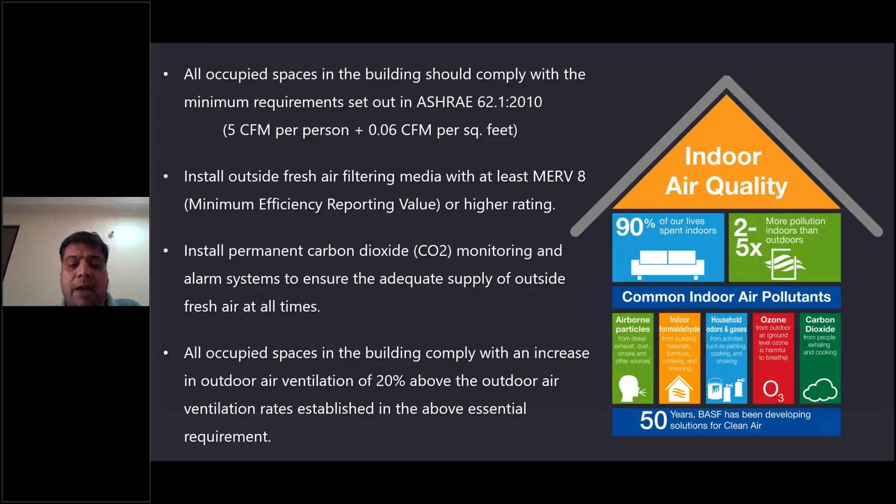So of course I'm talking about the entire sustainable building. It can reduce carbon emission by 35%, water use by 40% reduction. Water is a very important part - we will not be able to survive a single day if we do not have drinking water. And this is how we are wasting our water in daily life. Sometimes it seriously alarms me how the future is going to manage that.

In an existing factory, if the energy bill is coming around 100,000 rupees, and if they save 10,000 or 20,000, they can hire one more person. It can generate maximum jobs at this moment. If this pandemic happens, and if the government mandates these kinds of norms, it can generate huge job opportunities. And of course, waste is wealth - I always say waste actually is wealth. A lot of several startups are coming up in the waste management process. So one sustainable building can reduce so much carbon emission in that area.

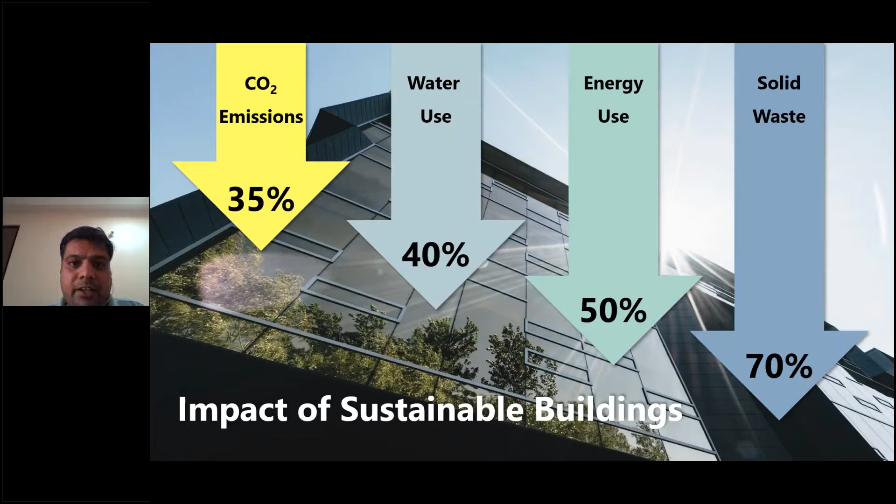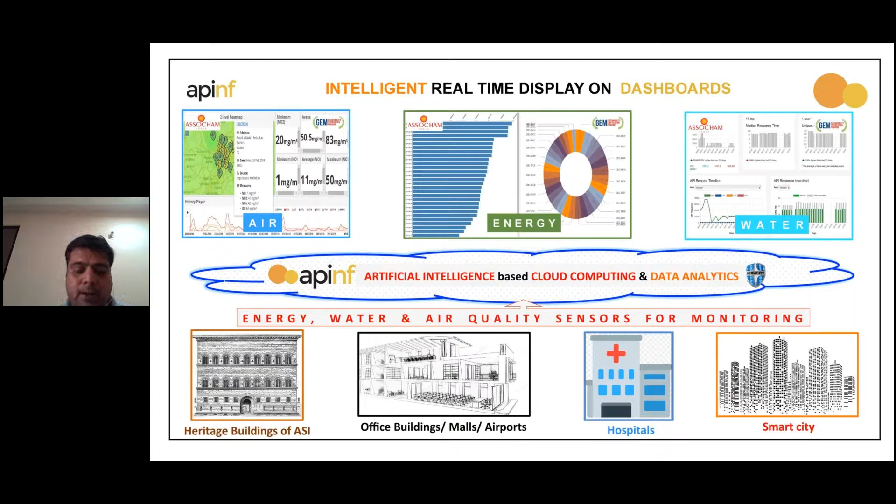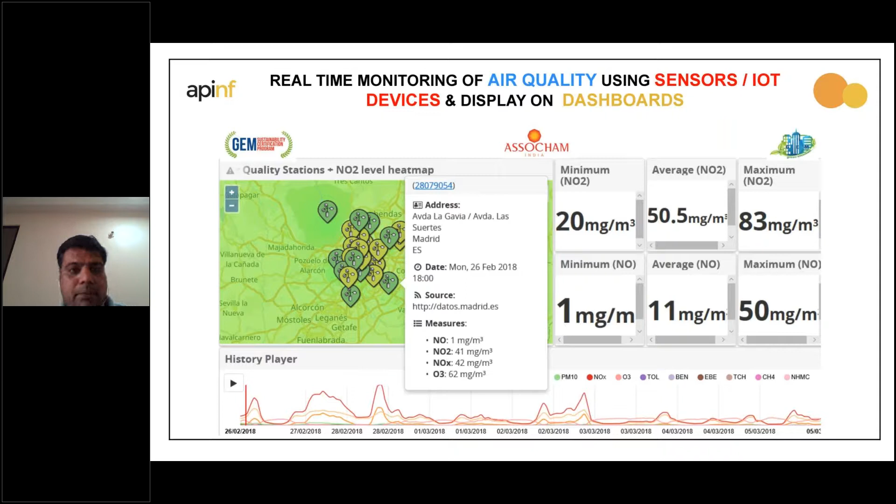Now we are talking about the intelligent building, a smart building. Everything is on cloud - you can get the entire energy, water, and air parameters on the cloud also. ASSOCHAM GEM is doing the same way, so we can have the entire building on the cloud and do data analytics. This is the first kind of new concept they have made in that area. So with real-time monitoring, they can monitor minimum nitrogen oxide and nitrogen dioxide levels, the air quality parameters also, and this is for every project - the GEM portal manages these things.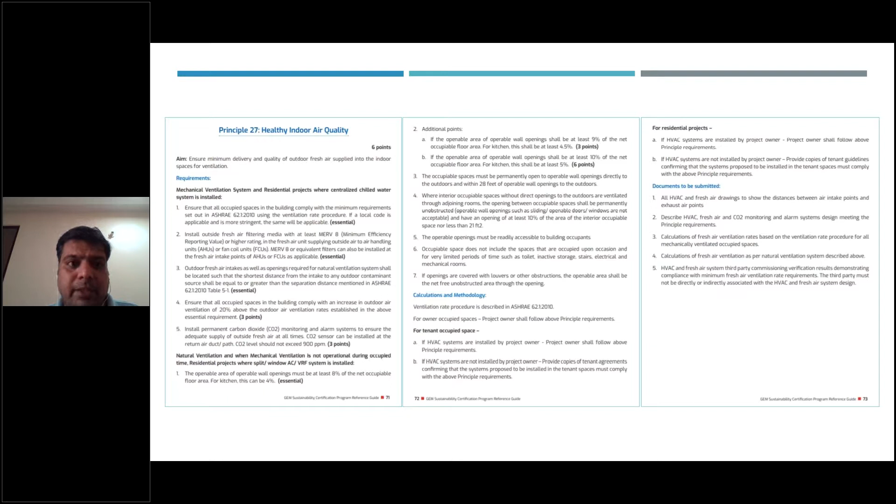So healthy indoor air quality is a very important part, and they have mandatory criteria that minimum fresh air has to be provided in the building. So in the end, I would say the sustainable building market is growing year to year, with huge requirement. I follow several companies and articles on LinkedIn, and every day I'm reading a new innovative policy coming around the globe on sustainability. Sometimes it's called circular economy, sometimes energy efficiency, water efficiency - but the entire sustainable market has huge demand, huge career opportunities, and people have to come forward in this industry.

So this is, guys, I'm sure most of you will write this exam, then you will have this certified professional certificate. It will add a lot of value in your CV, because whichever company or field you are in, whether teaching or anywhere, this credential will help you a lot, because it will make your CV filtered with these credentials.